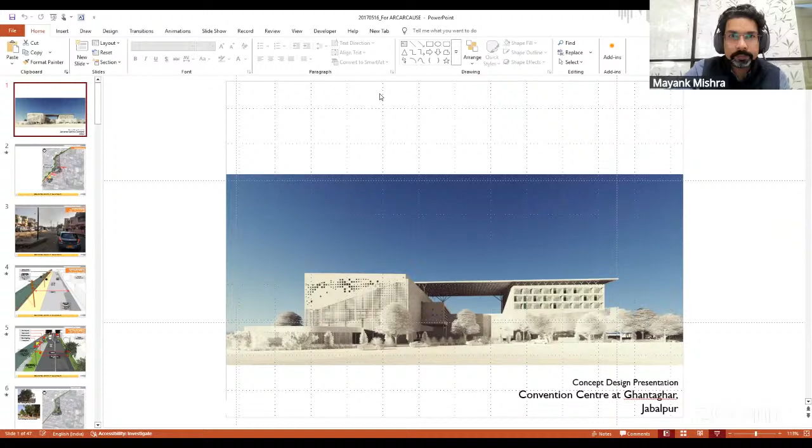So I hope you can see my screen. Yes, it's visible. Not full screen yet. So is it full screen now? Getting the full screen? Not yet. Wait.

Yes, we got it. Okay.

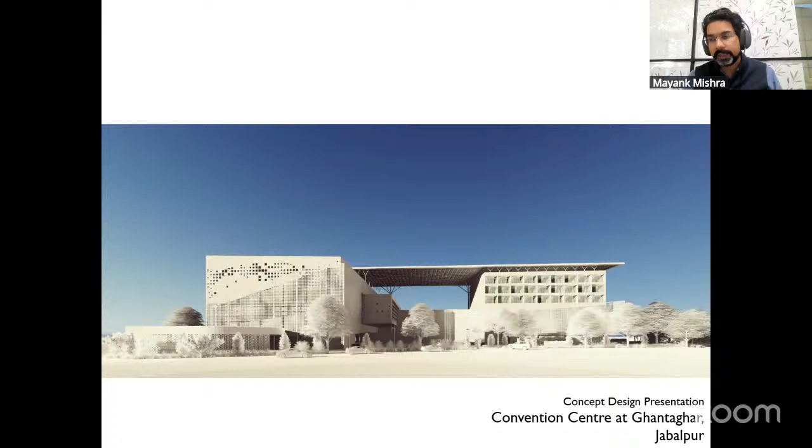So this was a convention center designed for a project in Jabalpur. It was a competition project set by Jabalpur Smart City. They had a very tough site, which was in the center of old Jabalpur and the new Jabalpur, which would mean that old Jabalpur was pre-British era Jabalpur, which was a completely built up site with the style of construction it had was very closely placed homes and all of those.

While on the right hand side, what you see was the British era construction style, where everything was sparse, the buildings were monumental in nature, and they had their own style of construction at that point of time. This site has an interesting approach from various locations, from the old city and the new city both. This is basically what it covers.

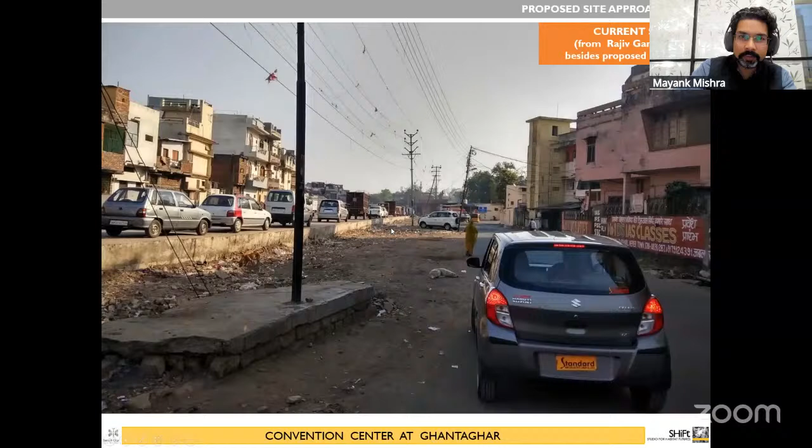It also had a proposed green road running parallel to the site, which becomes one of the most important points when we were designing the whole complex. These are some of the pictures which was from that green road. So it was still under construction. Most of it was designed. So what happens at the urban infrastructure level is people do end up designing the green roads, but they don't end up looking at the nearby low roads of what is happening to it.

So we had a proposal to actually make it much better. So this was the current situation. And instead of going with the business as usual model, we decided to use the ROW to create a separate walkable area, which could be for the pedestrians. And being a convention center, you would have lots of people coming in buses, which could be public transport provided by the center or by the organizer; the road outside can also act as the places where people can get dropped off and picked up, reducing the stress on the site.

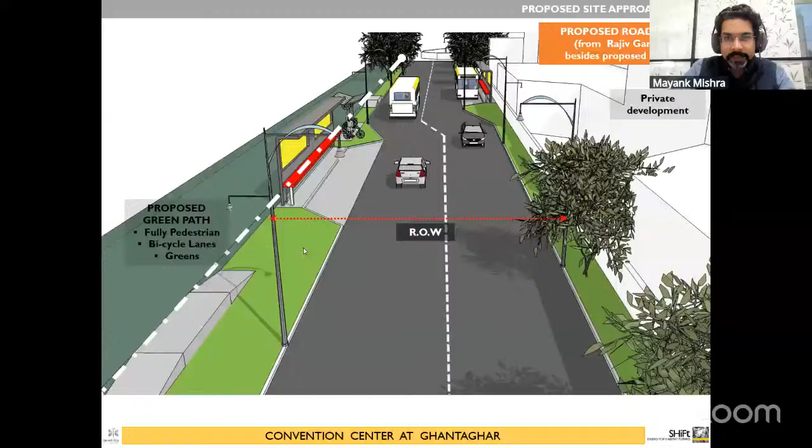Why I'm saying reducing the stress on the site? Because the site was very tight. It was about 2.8 acres, and they were expecting people in the range of 3 to 4,000 coming into this convention. So the right of way was again redesigned in a way where you can have bus drop-offs, walkable areas, and still use it as a two-way carriageway, which was already planned as it was.

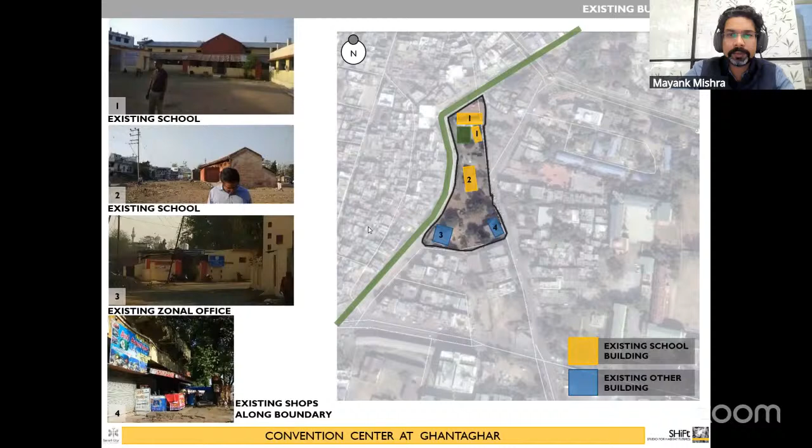It had two existing trees. This was not easy to retain, so we had to let them go. There were some existing schools and other complexes on the campus. This is how the site was. So the rear side is what you see, the green road, which becomes parallel to this road where you see the cursor is right now.

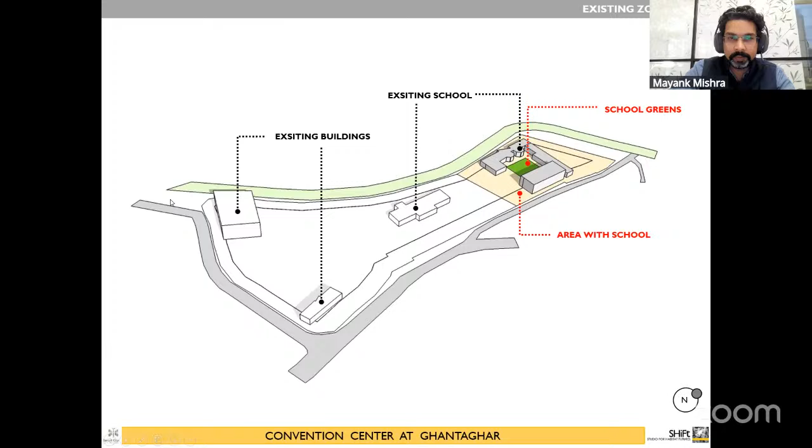So I will quickly jump to the zoning. We had various options for zoning of where to place what. It had a hotel for about 40, 45 rooms with a banquet hall facility, a convention center, and spillover greens, which was required as a part of hotel or convention area. These are various zoning options, and they had their own pros and cons, which we also shared in three-dimensional. Right now, I'm just showing you the zoning bit.

And the best option that we felt was, see, there was an existing school which they were not sure whether they will be able to relocate somewhere in the city, or will it continue to remain on this site? So we planned it in such a way that the school and the banquet hall can have a shared green. So at the evening time, the banquet can have a spillover, while in the daytime, the school kids can use the greens as a play area.

This was a school up to class 4, so it was only a primary school. So it didn't mean that you would need large play areas, but areas where they can actually get together, run, and all. The convention and exhibition facility was placed more towards the road to reduce the congestion and allow quick ingress and egress from the site if there is any parking happening inside.

There was a central court which was planned in such a way that it becomes like a buffer area for both these spaces. So this is how it was planned: the banquet, the convention, and the... Now, when we were doing this planning, we had an option to actually orient the buildings in a way where the convention center could be incorrectly oriented or the banquet could be incorrectly oriented.

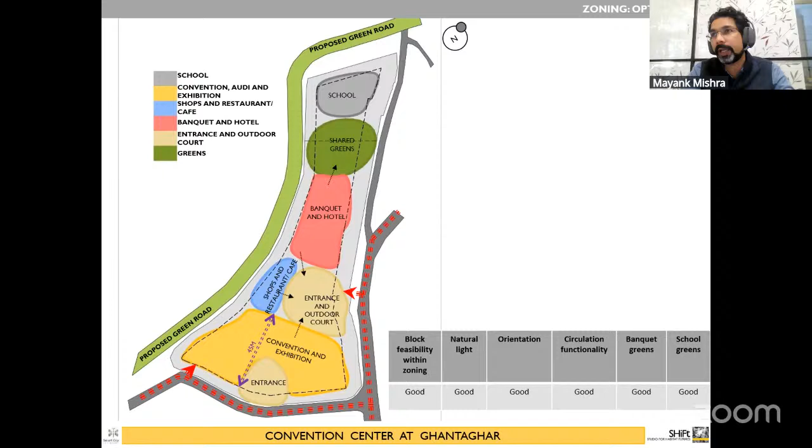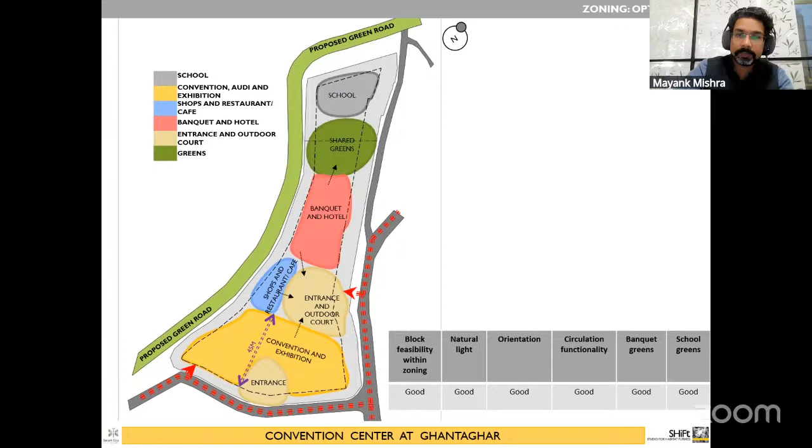Why? The reason being that in the past we didn't have the possibility of large projections because they didn't have a very high contrast ratio. Now with good LED screens, you can actually have projections and lots of things happening even in a well daylit space. So we decided not to go with a convention center which would not be daylit, but have an exhibition area which could be a completely daylit space. It had an auditorium on top of it.

Now, the auditorium was a space which would still need to be dark, so that if there is any function happening, it has that kind of focus towards the stage. That's why the auditorium was decided not to be completely daylit, while the exhibition areas and the conference rooms were planned as daylit spaces.

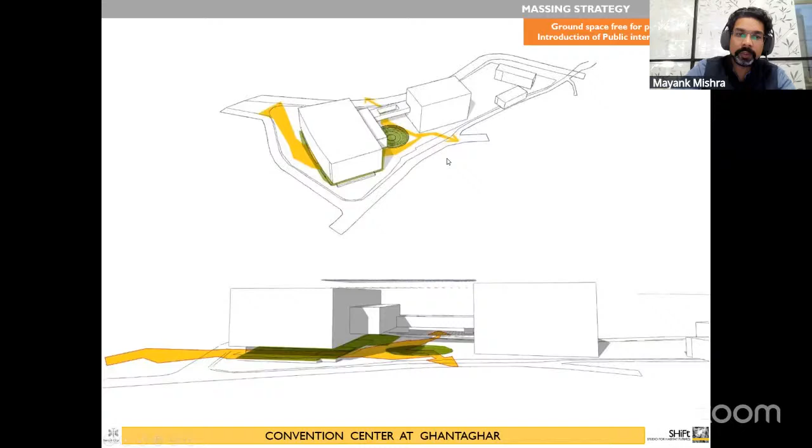The other important aspect was the urban design aspect: instead of creating a space which would hamper movement, we decided to pull up the whole mass of the building and use this space as a buffer area, which would act like a stilted space. This is something the city can use without paying for the convention center. This would act as a space for exhibitions, where people who can't afford to take an exhibition hall can take these spaces and use them as an area where they can display and have an expo.

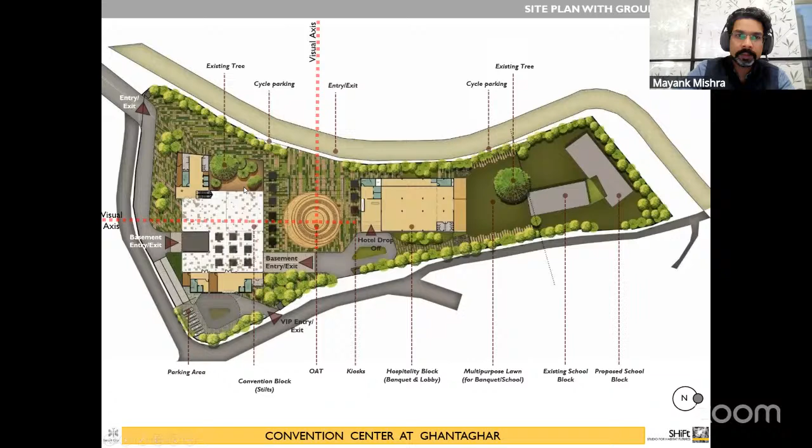Sorry. This is the site plan. I will quickly jump. Left-hand side is the convention, and the right-hand side is the hospitality or hotel block, connected through a bridge. This is where the exhibition hall is, and we decided to have good daylit spaces, so we placed lots of windows on the left and the right-hand side. Similarly, it had lots of other facilities. The exhibition area was a double height space.

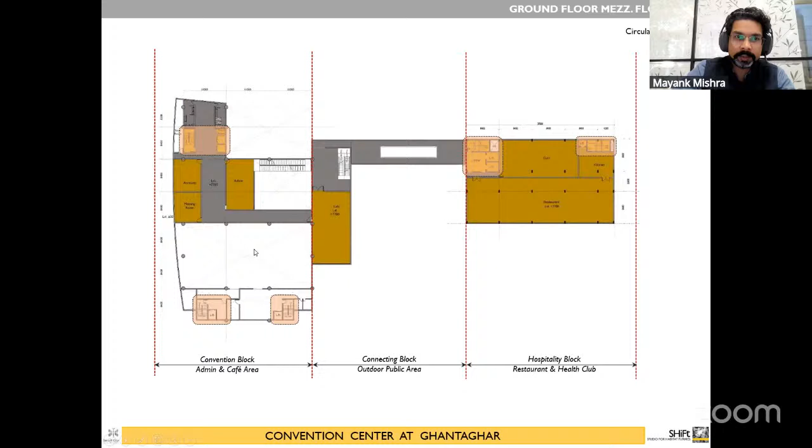Then there were other halls which had the possibility of opening towards the south and allowing south light inside these smaller 200 and 300 seater seminar and banquet types of halls. On the right-hand side is the hotel area. The topmost floor was again the convention's main activity, the auditorium block, which would have about 1,200 people sitting inside it.

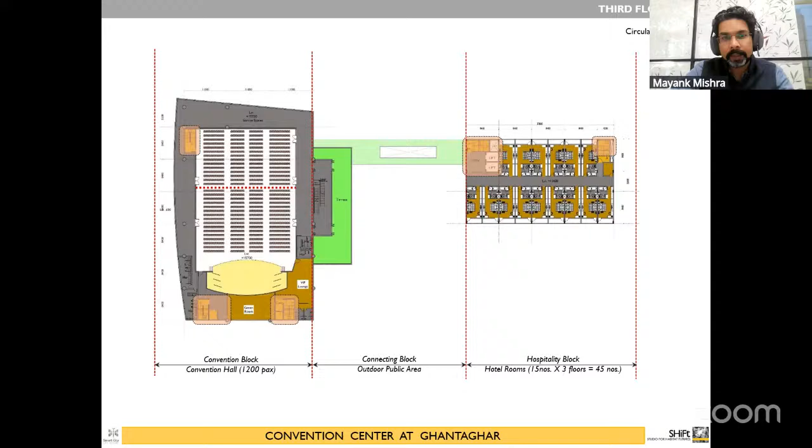We earlier planned to have a flat floor, but later on the client decided to go with a raked floor and not a flat one. The good thing about having a flat floor, which we felt should have been done, but it was the client's call, is that you can use it for multiple types of activities, which is now very common. You can also use seating which can be pushed, and it could be mechanized so everything can go back and you still have a large floor area.

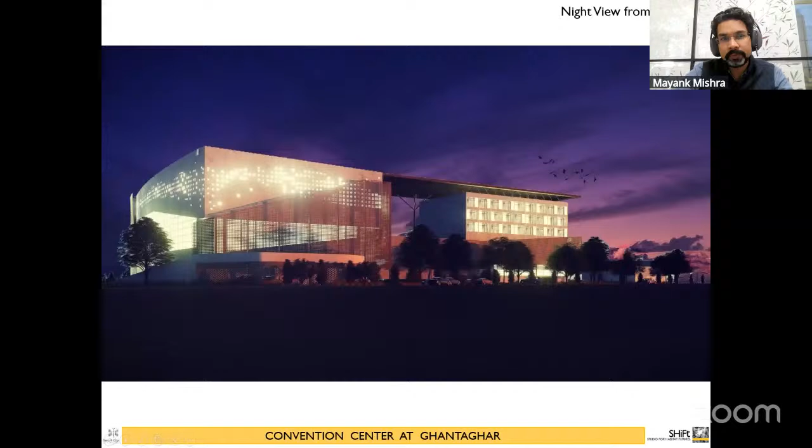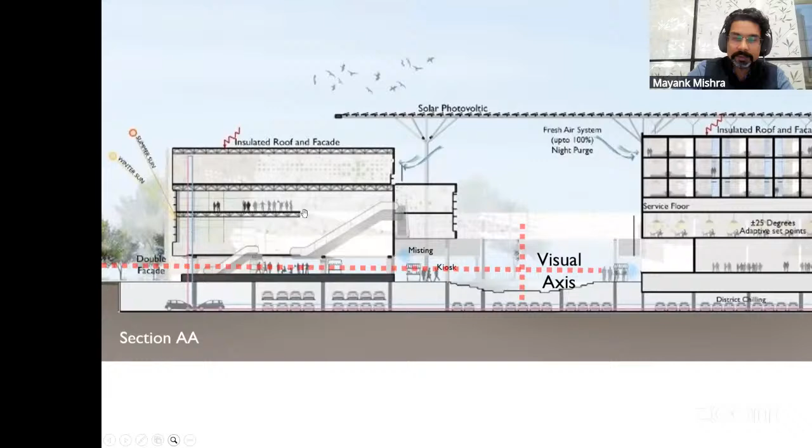These are some of the views from the initial stage. Again, I will quickly zoom in. This is the floor, which is completely stilted, which allows people to use this as a free-of-ticket area for smaller exhibitions where people don't have to pay. The top floor was the auditorium. We allowed good winter sun to enter the complex and summer sun to get cordoned off by using horizontal fins. I will also discuss the roof and other areas in the coming slide.

This is the section through the block, the hotel block, banquet at the lower floor, restaurant, service floor, and the hotel block on top.

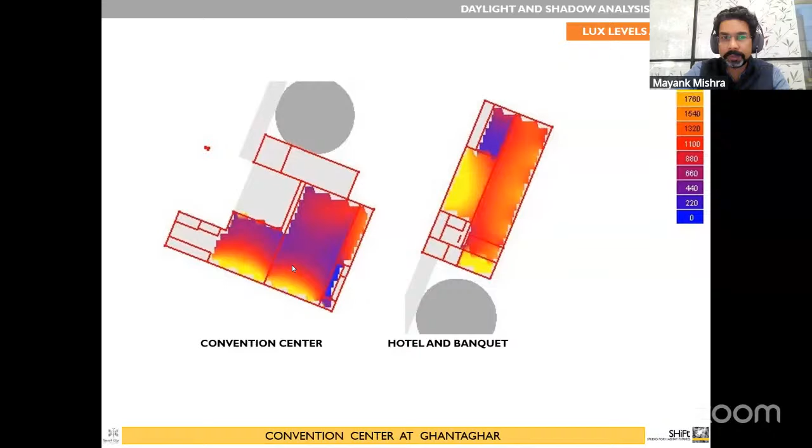Again, some more studies to show, okay, we are getting a good amount of lux level. So anything above 300 or 400 is a good lux level, because then you can have your independent lights in case you need to highlight any product or something of that sort.

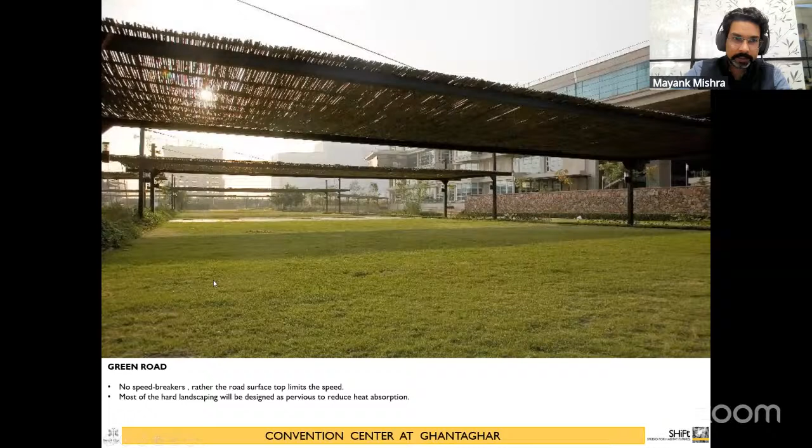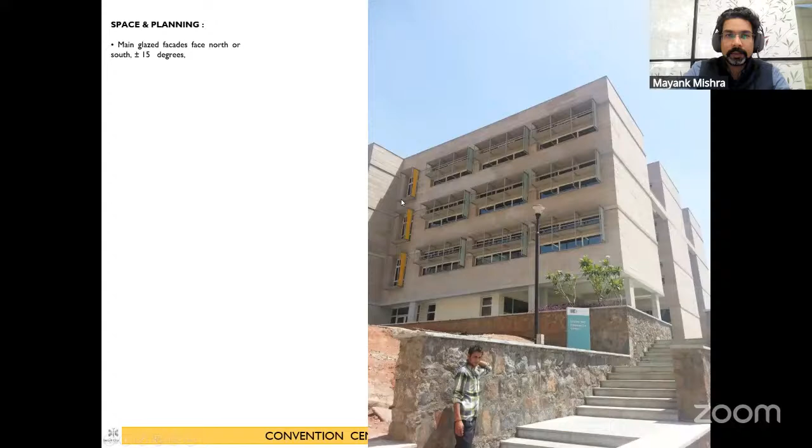Mainly pedestrian first policy, vehicular parking in the basement, the rooftop to be used as a productive landscape and for solar photovoltaic. The glazing to be faced to north and south, maximum plus or minus 15 degrees, which is what we tried, and also have enough shading device to it so that you don't get blockage, so that you don't get harsh sun coming inside the building.

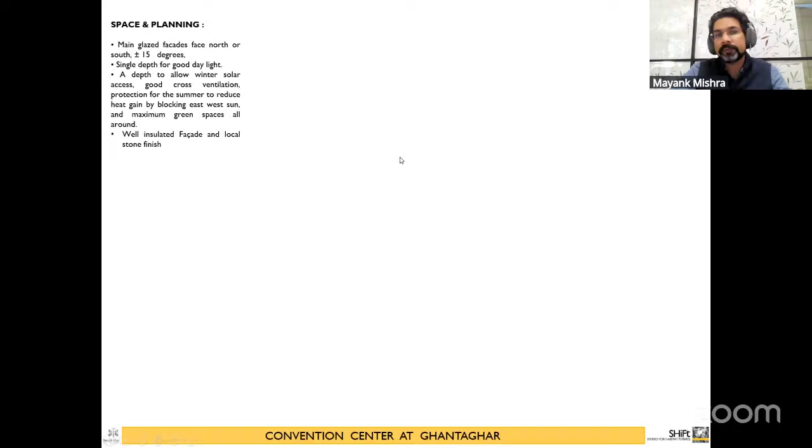Again, enough depth to allow winter sun to enter. Well insulated facade. This was an important aspect of design, which mostly people don't look at.

Now, convention center like spaces have a huge energy demand when it comes to air conditioning. It increases as people enter inside the building, and this is a peak that you get suddenly. It would mean that at any one day, you would suddenly have a huge amount of air conditioning requirement because an event would be happening there.

Now, it was important to insulate the facade of the building, make sure that we don't increase this demand from the external heat. That would mean that if there is any event happening in the month of May or June, when there is much hot and humid air outside, or if it's only hot outside, we should not increase the heat load inside the building because of external conditions.

And all that you need to cater for is the people who are coming inside the building and to cool that space. And that's why we propose to have a well insulated facade.

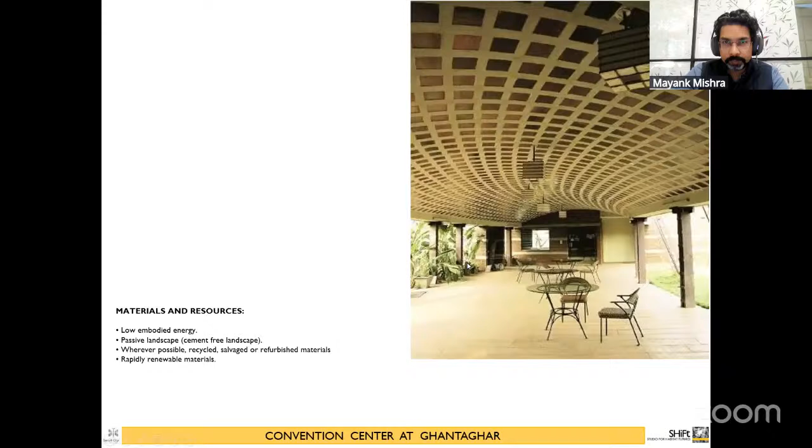Using low embodied energy material, I will quickly jump. That would mean using local stones wherever possible, allowing rainwater to percolate through means of bioswales, and use of lots of stones and other materials, and have rainwater either stored or recharged.

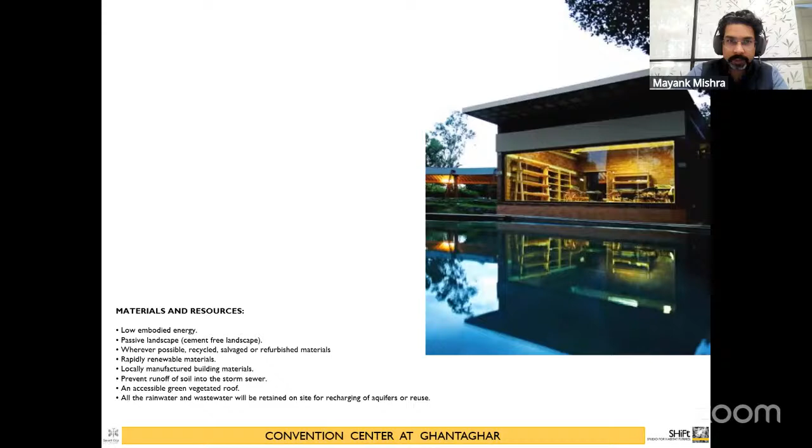When it comes to air conditioning, we decided to have a district cooling system, which would mean that in places where there is exhibition happening or an event happening, at that point of time, all the 45 rooms which are occupied in the hotel would not be occupied because people staying in that hotel will be using this space here.

So we decided to have district cooling, which would mean sharing of air conditioning between both the buildings through a chiller. In that case, you don't have to provide for two cooling plants, and also you can actually look at the diversity and provide air conditioning where it's required, not a place where you are doing air conditioning in both the buildings and actually letting the energy being wasted.

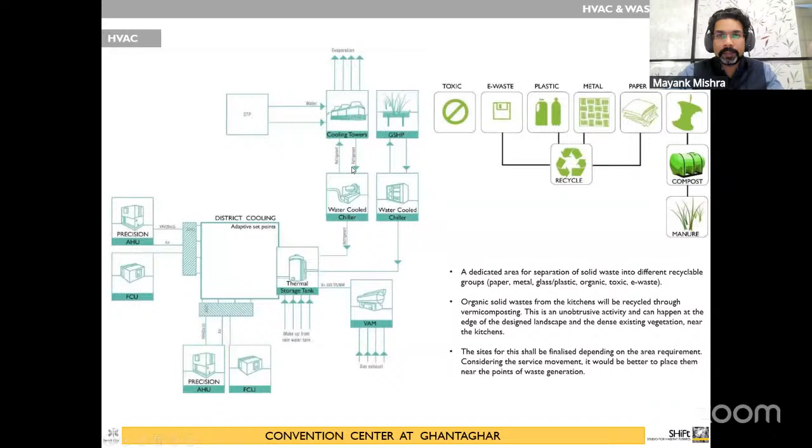So these were some of the images. I will now quickly jump to an important aspect of design, which I wanted to highlight.

Now, when we design a building like this, it's very important for architects to put this thing in front of a client to make them understand what all goes inside a building and what stages they should expect. Generally, the market practice now, post 1990, has become that the day concept design is finalized, people expect that the construction can start in a week's time. And that's not the truth.

Reason being that the more time you spend in designing and planning of a building, the more accurate you would be at the end result. So if I have designed something which would have X, Y, Z feature in it, and if I plan for it well in advance, I would be able to achieve that. And how can I achieve that? That would mean that I have to break this whole complex project into various stages of planning.

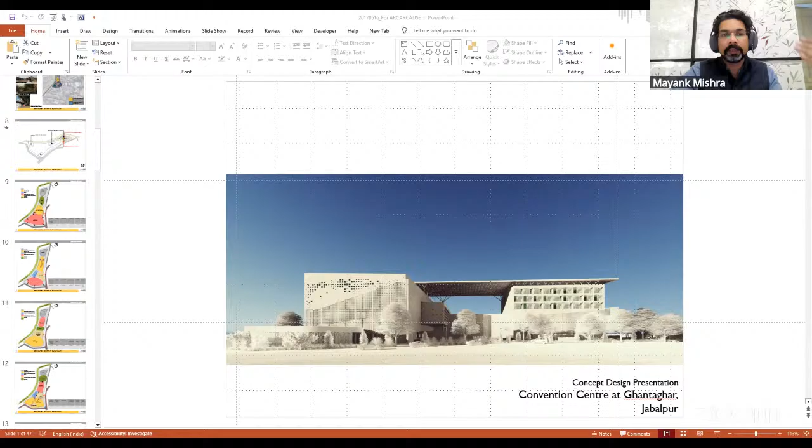The first stage of planning is what I showed you was a concept design stage. This is where you actually set the goals for the project. And it would mean looking at the sustainability aspects, daylight aspect, air conditioning aspect, the lighting, getting client to agree for the cost.

I'm sorry. We lost your feed. Yeah. Can you see it now? Yes. Can you see my screen?

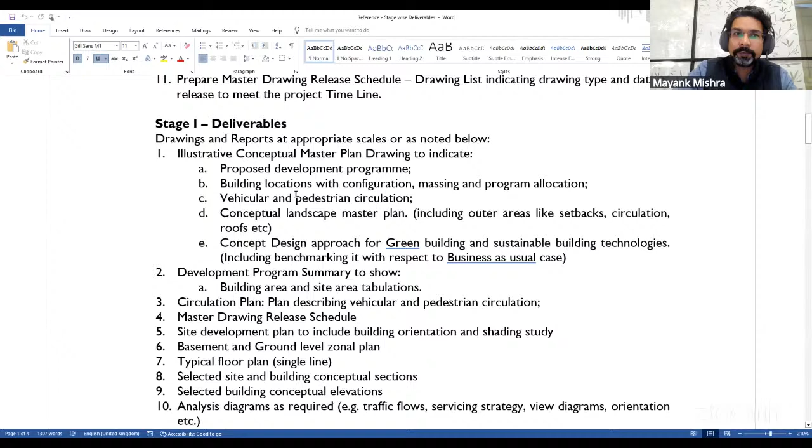Yes. So this is what goes into a concept design stage, and these are the general deliverables in the concept design stages, which would include lots of reports, the sustainability analysis, the traffic flow, the design basis reports for the structure, for the electrical, for the plumbing, and a project budget, which is very important when it comes to a live project. Reason being, most of these features, by the time they have to be executed, are thrown out of the window because they have not been budgeted for.

So if you budget them from day one, and if you make it integral part of the whole scheme, you would be able to execute it because the client knows, okay, I don't have to pay extra for it, and actually it's helping me. A simple example: if I would not budget for insulation, the insulation will not be implemented in the project because that cost has not been taken into consideration. That would mean that your air conditioning demand would increase. That would also mean your electrical demand would increase.

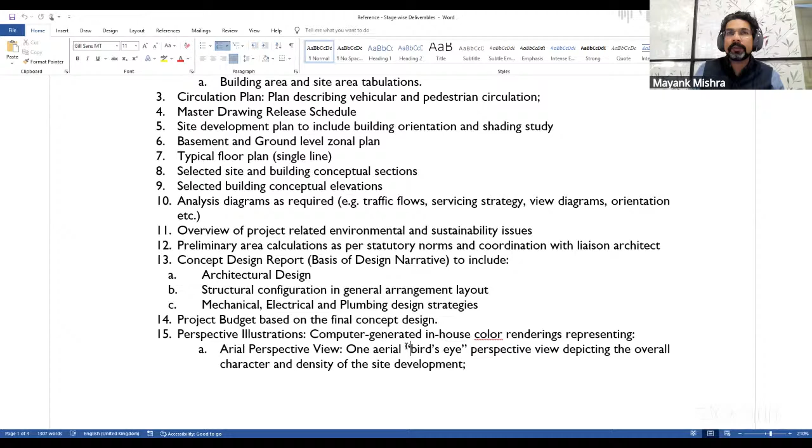What would that mean to the client? It would mean instead of buying a 100-ton chiller, the client would end up buying a 150-ton chiller. And we say, "Chalo, 50 ton hi to extra lag raha hai." But in the overall life cycle cost of that building, the cost of the insulation, which could have been recovered in 3 or 4 years, will go for a toss, and the building will pay for this mistake throughout its life of about 60 years. So that's why it's very important to have these part of the concept design stage from the early stages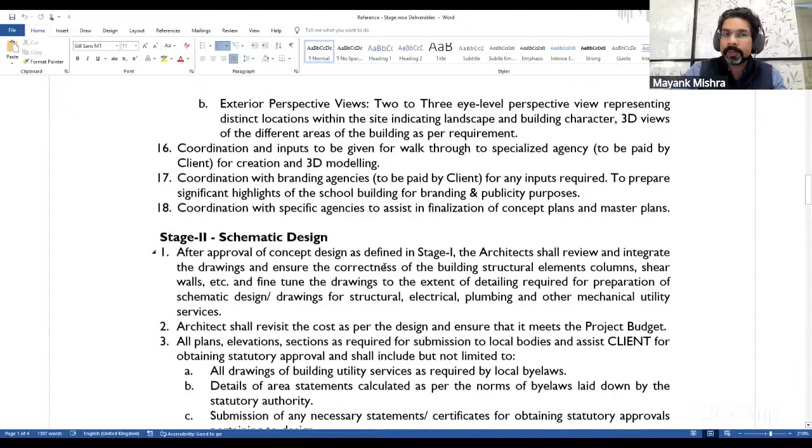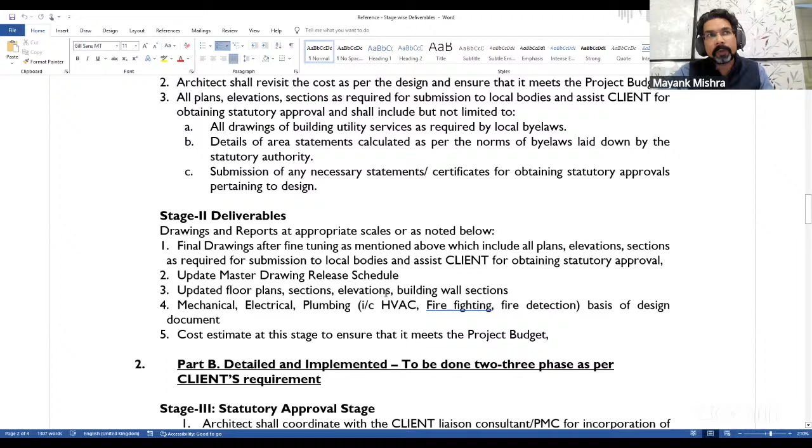and include them. The second stage and the most important stage is the schematic design stage, which is when you actually get your consultant to vet your design, make sure that they are as per the requirements. You have your single line diagrams, your requirements for air conditioning, your locations for all the shafts and other things, so that you don't face the problems when you are going into actual execution.

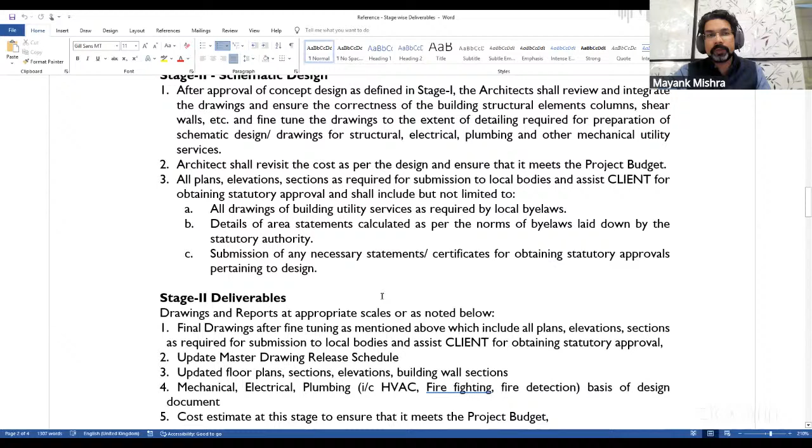After that comes your statutory approval stage. Now, in all of these stages, you need a sign off from a client. If they don't, it would actually mean that you're just doing it for yourself, and if you don't make them part of it, they will not agree to it at a later stage. After that comes your statutory approval stage, which is when mostly you get your licensing done, which is the approvals from the local bodies.

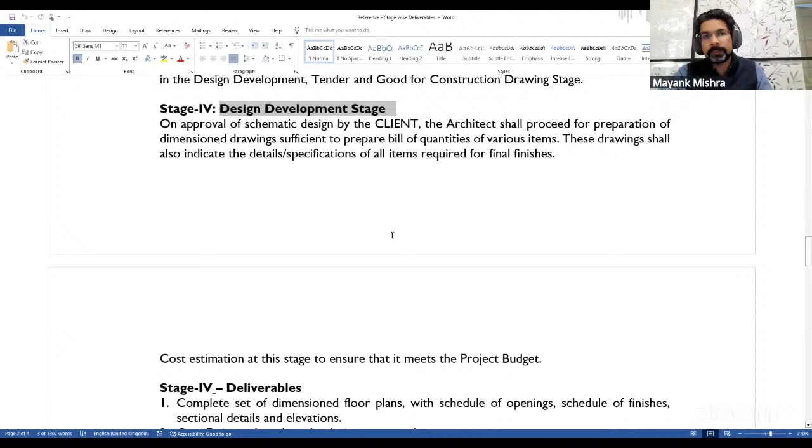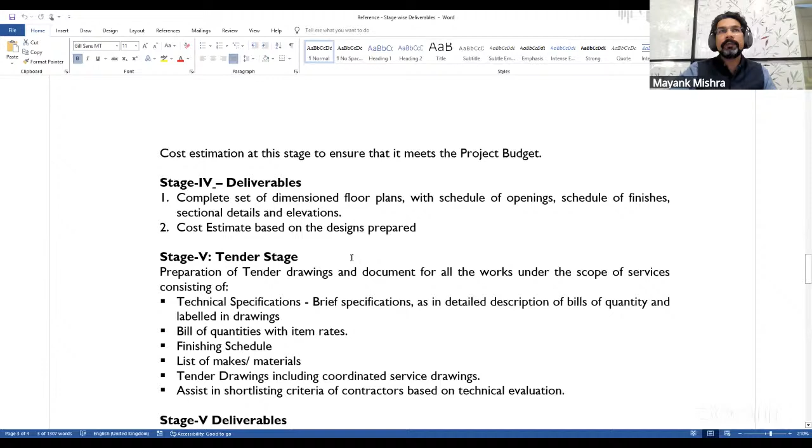And in parallel to that, you would run a design development stage. This is a more detailed stage than your schematic stage, because here you are actually putting the real dimension that would end up becoming tender drawings and help the person who's bidding for it understand the building well in advance. If you have not put those things in early stages, then the person who's bidding for it will miss lots of important details and end up not quoting for it.

Then last is your good for construction drawings. Now that includes all kinds of drawings, and I would always recommend to have GFC drawings in place before you actually break ground, because otherwise you will end up messing up the project.

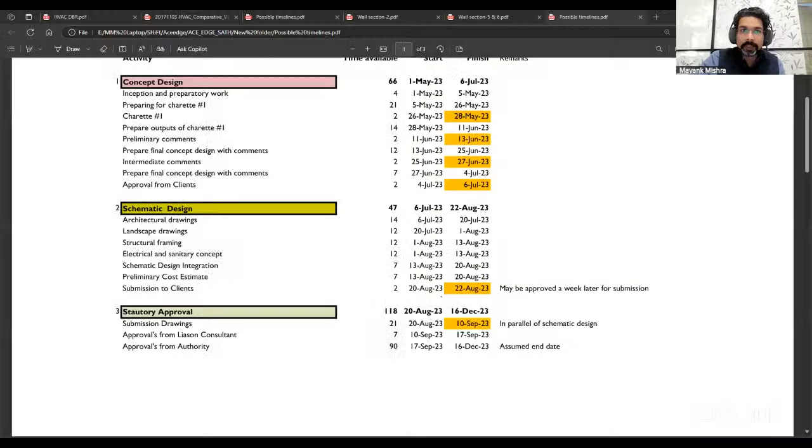I will quickly show one of the project timelines so that you get an idea of what it means when you are sharing it with the client. Now, this is something which we do with our clients even before we get on board, which would mean even before you are about to sign an agreement with the client, you should tell them in advance, expect so many days for the concept design, expect so many days for schematic design.

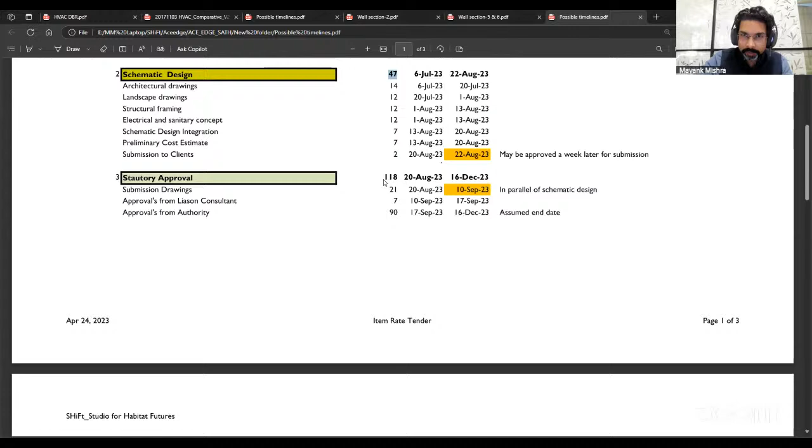Then comes your statutory approvals. Your design development happens in parallel, meaning while statutory approval drawings are getting approved between 20th August to 16th December, you have time to finish your design development and tender stages and have a good-for-construction drawing ready the moment you are about to start construction.

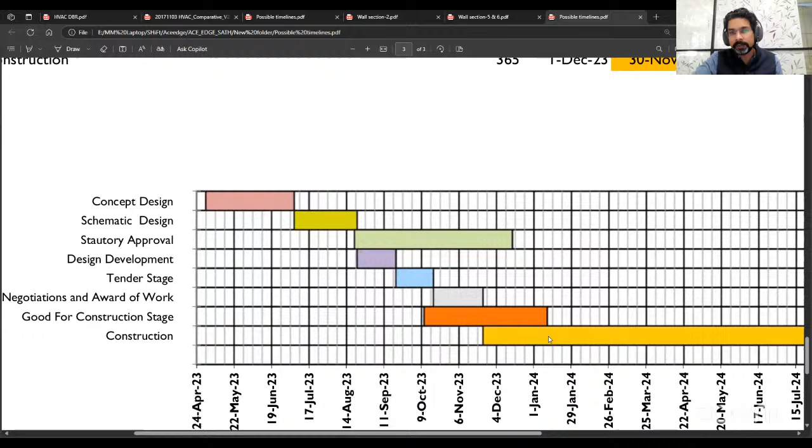This is how it looks in a bar graph. If you can see my screen, the concept design leads to schematic. The statutory approval takes a longer period. That's where you do design development, tender stages, and good-for-construction drawings. It's always important to finish it before the actual execution on site starts.

I will share some more important insights of this project, which we included during the tender stage — some of the drawings. So when I say your contractor needs to know all of these details in advance, this is what it would mean your tender drawing should look like.

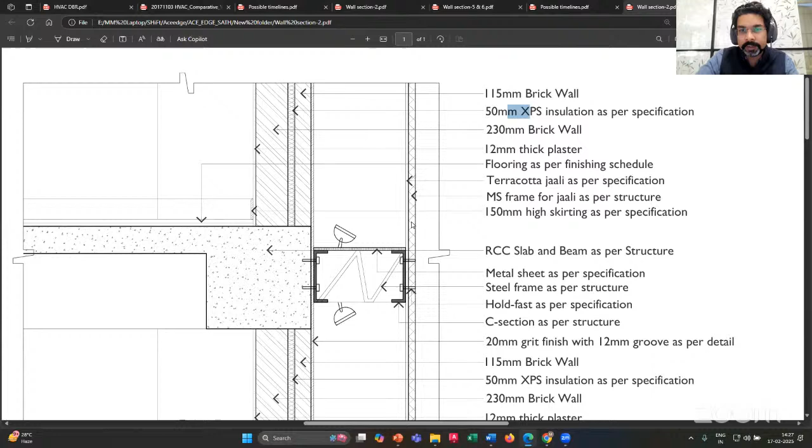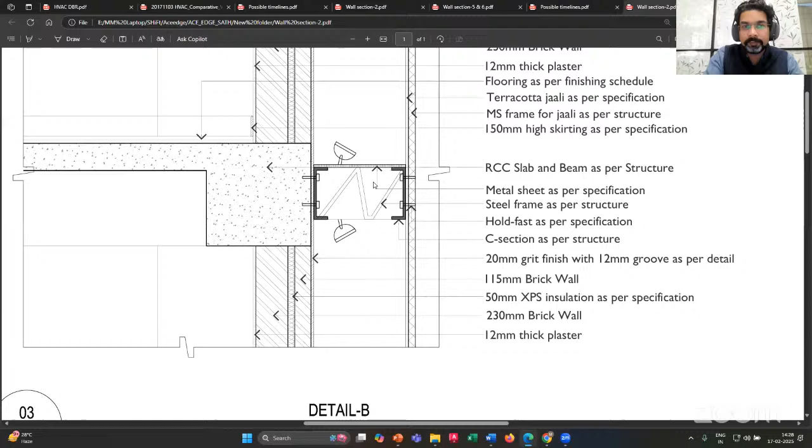It would mean that you have already included insulation as part of the building design. It should also show your building elevation, how a double facade would work and where it would get supported — though you won't have a good-for-construction detail for it yet, since your structural consultant might not have even detailed the size of this member. But having this in place lets the bidder understand how much needs to be done and how to plan for the project. Otherwise, he will either miss on cost or miss on time, which the client would not want to compromise on. It should also include details like terrace waterproofing and insulation.

So these are some sample drawings that become part of the tender stage. There are about 15 to 20 sections that we share with clients and contractors before they bid for a project, and thereafter they go into the construction stage where they see the details of everything.

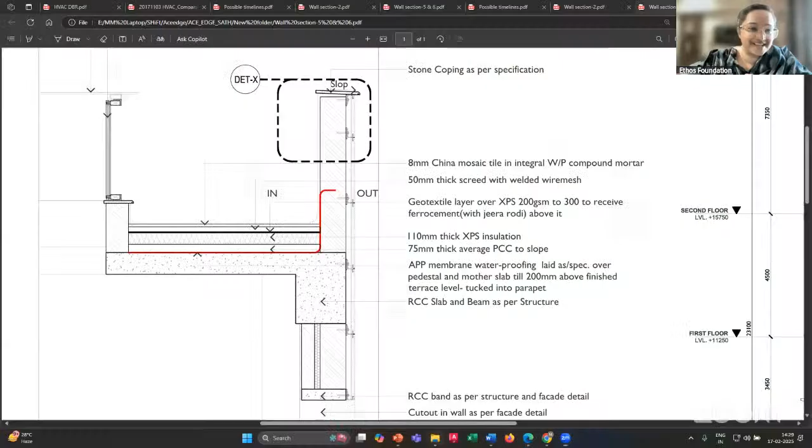It's the short one. This was a project in Defense Colony, Delhi, in an urban landscape which had a few existing trees. The client loved the trees, and so did we. We wanted to save them. These were some interior pictures of the existing building.

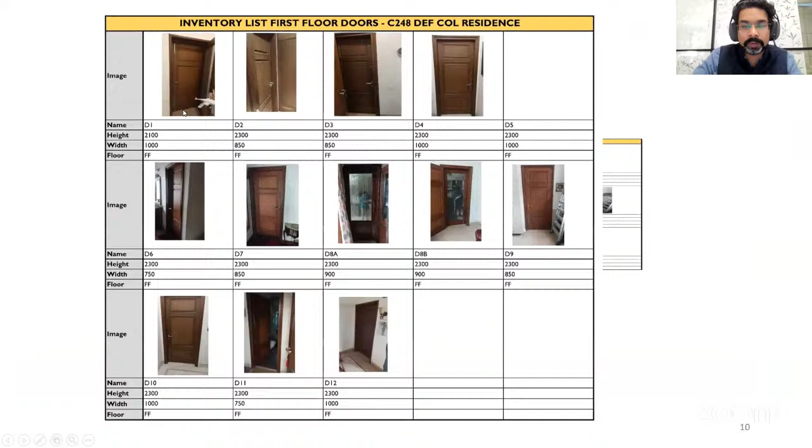We decided to reclaim all the wood possible, the teak which was used, and reuse it. So we labeled them before the demolition started, and made them part of an inventory list for the tender when it was about to come.

The design was again based on the principles of solar passive architecture. So we made sure that you get good winter sun.

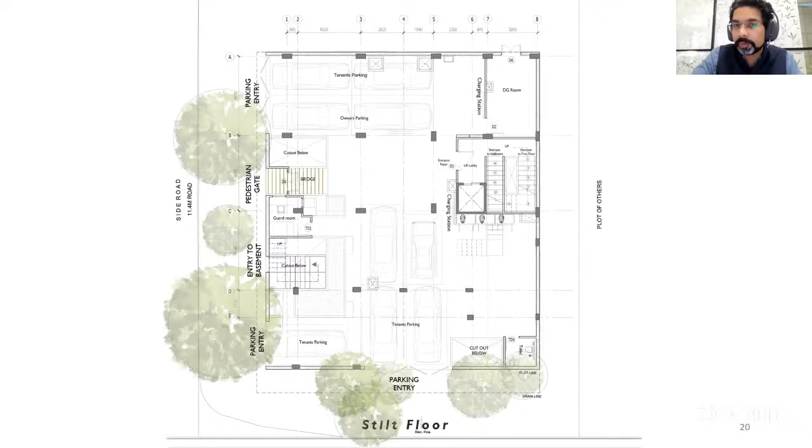During the concept design stage, we made more than 40 or 50 options for these kinds of plans so that the client doesn't change it at a later stage. We wanted to make sure they don't end up saying, what if this study room goes on this side and the bedrooms go on that side. So to avoid that, we did all the iterations during the concept stage itself. That's why you need more time during the concept stage than later stages, where the client would end up changing things.

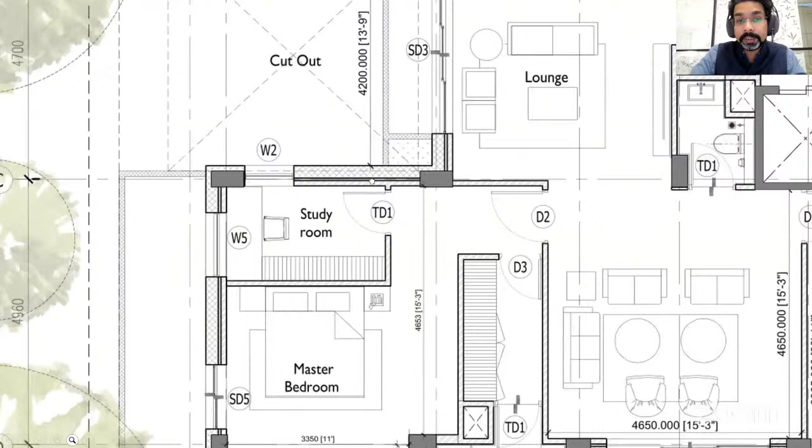These were some important features, including the super insulated roof. From the initial stages, we got clients to understand even in concept design that the wall thicknesses would be much higher, giving more comfort. They knew what the room sizes would be. This gave them the confidence to understand that even if they were losing some square footage in a prime location like Delhi, they would still get better comfort inside the building.

That's why it was important for us to make this part of the concept design stage itself — an external AAC block, insulation material inside, and then an internal wall, making a complete thickness of about 450 mm.

Efficient double glazing, cross ventilated spaces, indoor air quality. Because Delhi has a huge problem of PM 2.5, we decided to go with an air conditioning system which would allow fresh air to come inside the building without compromising on the indoor air quality.

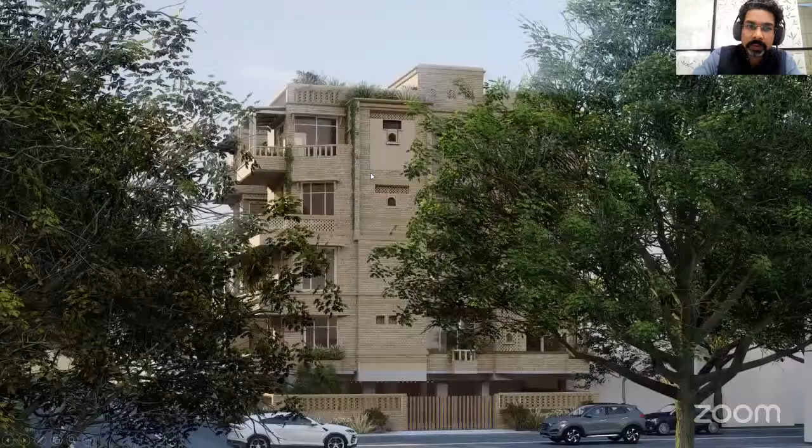So there were various air conditioning systems which we utilized for the building, using low carbon material, locally sourced. These are some renders we created. This is now under construction, getting built in CSEB block with lots of local stone. The plain brown color you see is the stone, and the rest is the CSEB block.

These are some more images, and this is how it would look. So it would not look like any other builder house that you see in Defense Colony or in Delhi. An important thing we did was create a courtyard on the third floor, which was a wow factor for the client. They wanted to feel that it's a ground floor building only, so on the third and fourth floor we created a good connected large courtyard space.

This is that courtyard space, and these are some more renders.

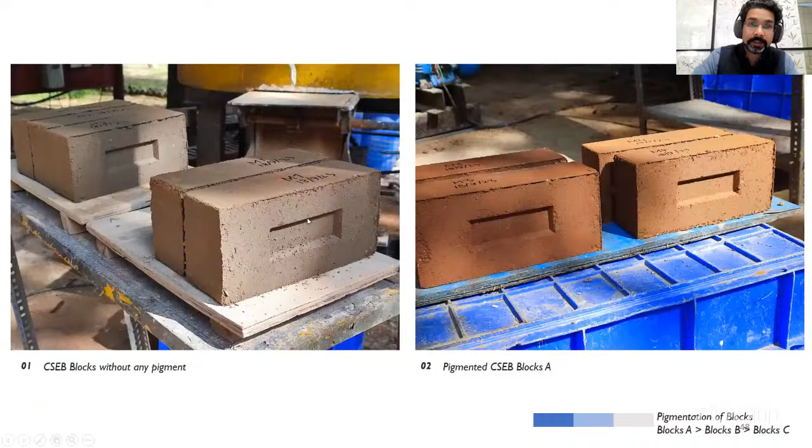Now, even with CSEB, before the project started and went into construction, we did lots of iterations in the color and other things, got them approved by the client, and then went to the tender stage. These are some details which I will share with the team in a one-to-one session, but all of this becomes part of the design.

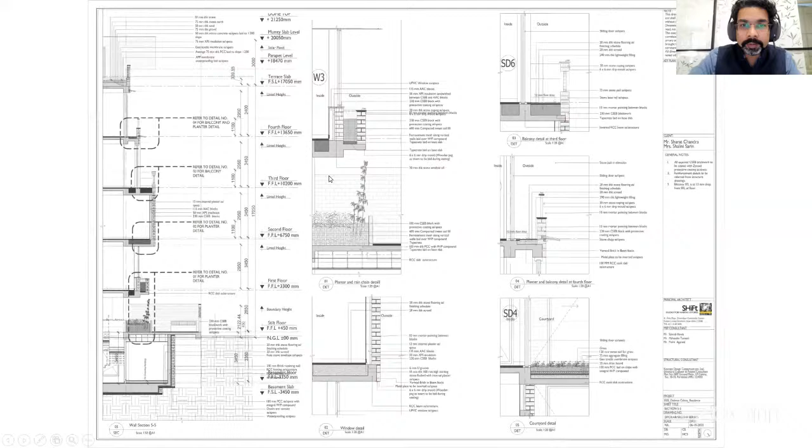I'm not showing services right now, because services is a very complex process which I will explain to the team separately. I'm showing architecture because it's important to understand, as an architect, it's our job to include all of it, like this drip irrigation, in the early stages of design itself, and also to make sure the thicknesses are already in place for everything we are designing for.

These were part of the tender drawings we gave to the contractor, and this is where we spent a lot of time. Later on, it became much easier for us to execute on site. These are some more sections. I will stop here.

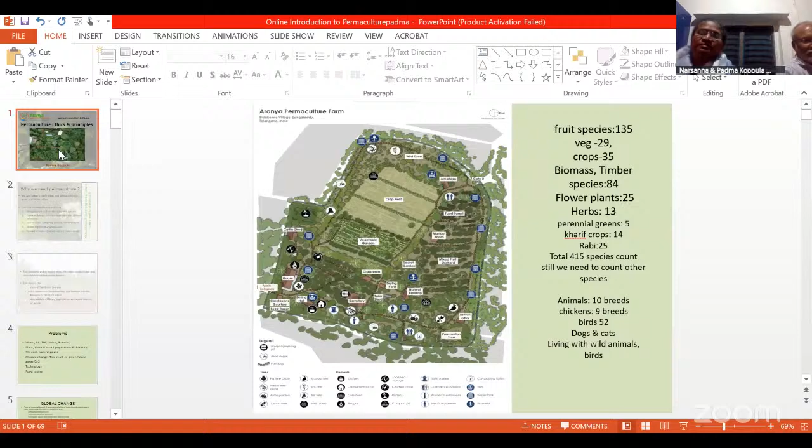Yeah. Yes. Padma, go ahead quick. Yes, sir. We can see your screen, ma'am. Is it audible now? Yeah. Can you do the slideshow mode? Just the full screen? Yeah. Yes.

Some of the slides I'm skipping because we're running out of time. Narsanna already spoke about it. So what are the things which we want to do as designers? We want to live on planet Earth: environmental conservation, reforestation, land protection. What is it that we want to do? We want to live with the environment and we want to work with nature. So we need to consider

You're not audible, Padma. Sir, I think we lost their connection. If you would like to continue.

other things. We need to talk about renewable energy, energy, culture and art, everything we need to talk about. Those who want to know more about permaculture can just read about it. Narsanna already explained it. It's the conscious design and maintenance of cultivated ecosystems which have the diversity, stability and resilience of natural ecosystems. Narsanna already told about how we can create the microclimate.

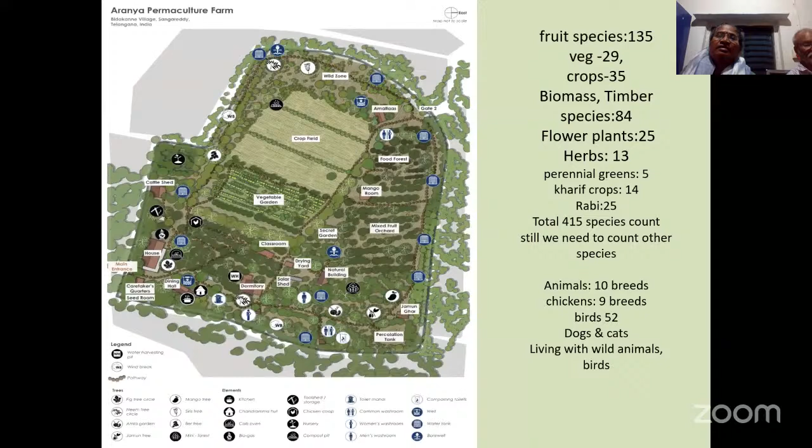As I said, all 365 days, how we can generate food. Food for the humans, food for the birds, food for the microbes, food for everything. It's self-sustaining, meeting our needs, meeting their own needs. So that's where the permanency is. Permanent agriculture can continue in the same design. Observation: when you are designing something, observe wind, sun, water flow, trees, and surroundings. First observe and then start interacting with any structure or farm before you do anything.

Catch and store energy. Padma, you are exceeding your time. There is one more question. How much time do I have, sir? Yeah, I think you should just do your closing.

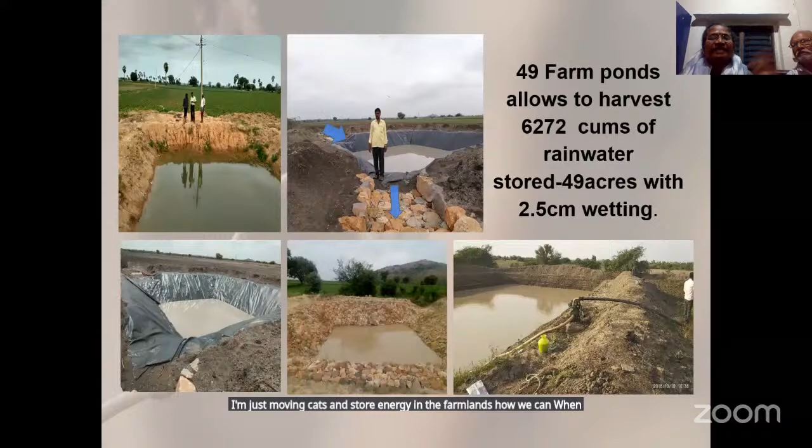Okay. So like that, we can design the farm. This is a small design which I can show, how the entire water can be stored by designing these things. There is a big slope. I'm just moving on. Catch and store energy in the farmlands: in dry land areas where there is no water, how you design, what material you use.

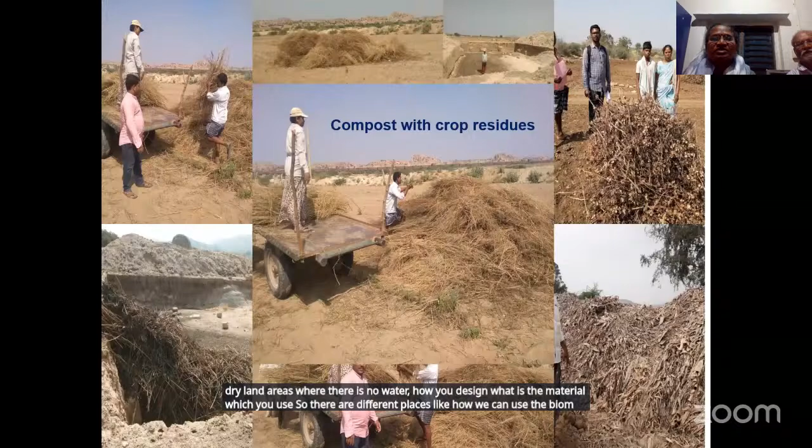So there are different places, like how we can use the biomass, how we use solar energy, how we save different species of seeds, and then obtain a yield for every life, how we can get the food. So how we can design according to your design, and also working with diverse women and men, people, and community. And sometimes we may have a lot of desires, but what climate change is offering us, we need to keep in mind and act upon.

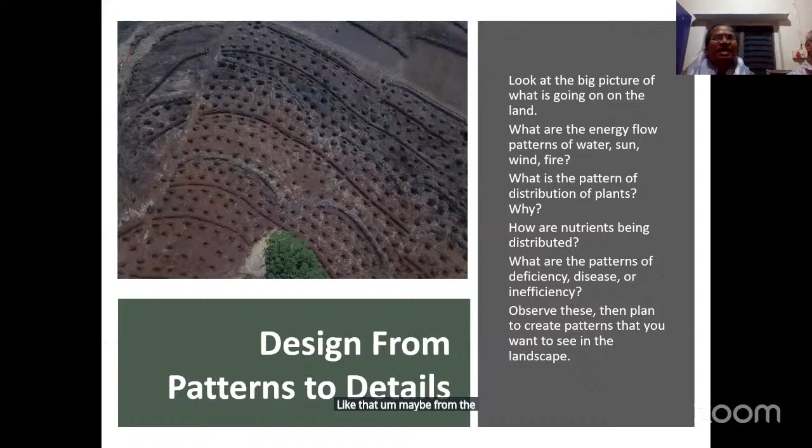And using local resources and producing in new ways, always try to give importance to local resources and renewable services, local seed, local fertilizer, those things. How we are using grey water systems, how you design from patterns to details. In natural patterns, how are you going to mimic them in the design? Maybe from the forest ecosystem, any ecosystem you can take. If you can mimic those designs in our design system, they are more resilient.

So how are you going to create natural guilds? There's a circular pattern, there's a random pattern; how we can integrate different elements into the systems for more energy, and always start small and scale it up, like in a 1 acre place.

So how the diversity is giving so much energy, so much food. So these are the things which we can have in permaculture: how you design your life, how you design your systems. Like I also work with farmers, and the farmers, though they have 100 acres, they don't have food. But people have 1 acre of land, and because of their design, they are able to access all kinds of food. The entire thing is how you design. So what is your objective of it?

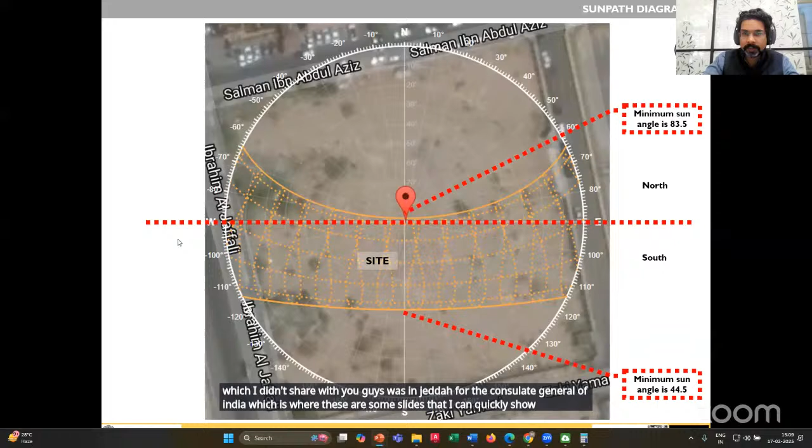This is another project which I didn't share with you, in Jeddah for the Consulate General of India. These are some slides I can quickly show you, where we did the sun path analysis of the whole thing and also analyzed the dry bulb and the relative humidity map of the city, Jeddah. Jeddah being a place where the maximum temperature doesn't go above 40 degrees Celsius, but the humidity level goes as high as 90%.

And this becomes very challenging when it comes to designing a building to reduce the demand for air conditioning. If I go the traditional route, any air conditioning engineer would say you have to air condition the whole building throughout the year. And if I take a step back and ask what I can do to reduce it, I would try to plot it on a psychrometric chart with the help of my air conditioning consultant, and find out what is happening.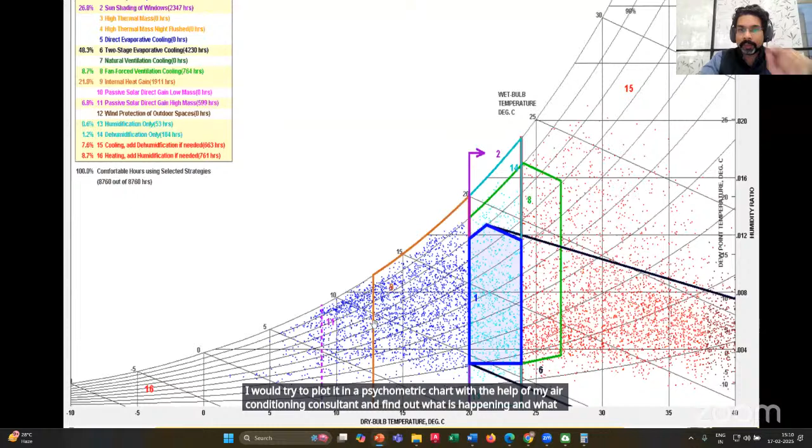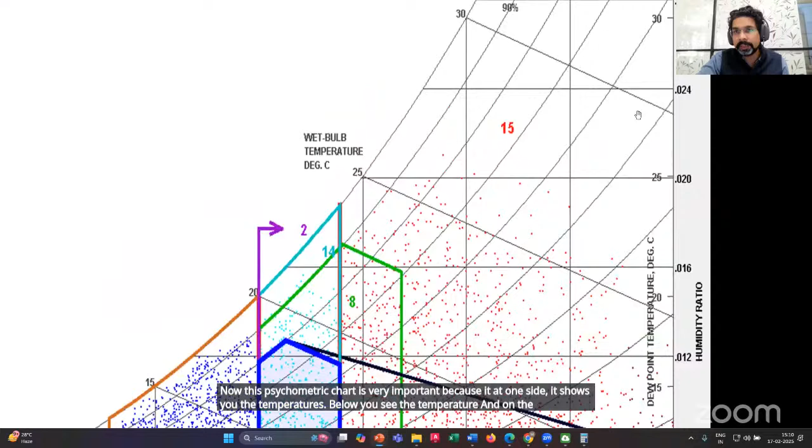Now, this psychrometric chart is very important because on one side it shows you the temperatures. Below you see the temperatures, and on the right hand side you see the relative humidity. So these lines are humidity lines and these lines are temperature lines. Now, when you plot the whole season, the complete year, this is what you get. And then you start getting various subsets of it, which would mean various technologies or applications that can be used.

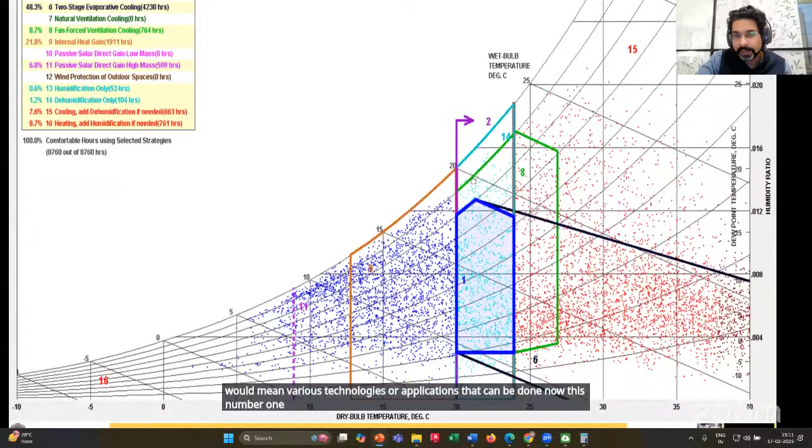Now, number one is where the temperature is less than 25 degrees Celsius and humidity is under control, not as high as expected. In this kind of scenario, you can actually get comfort by not doing anything. Number two, you can actually achieve good comfort just by shading the building. So if you shade your building, you can reduce your air conditioning demand dramatically.

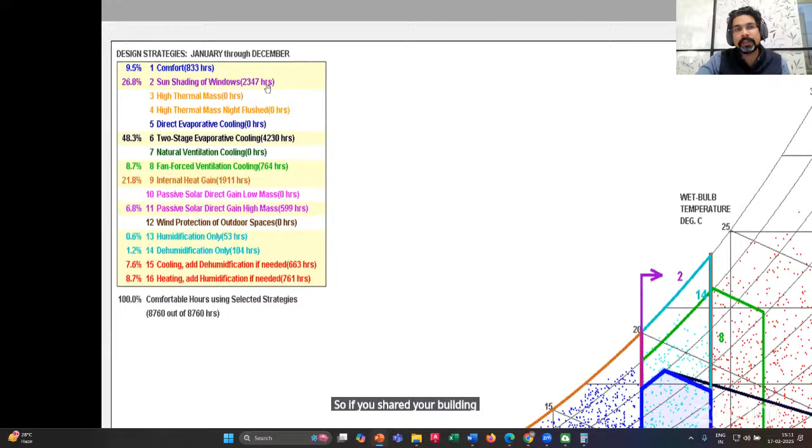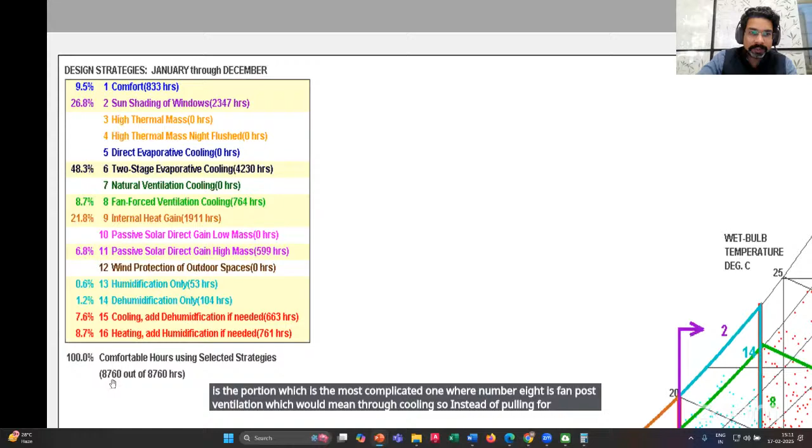Now, there are various other stages you can actually look at. This red is the portion which is the most complicated one, where number 8 is fan forced ventilation, which would mean free cooling. So instead of cooling for the complete 8760 hours, we planned to cool it only for a limited amount of time and not throughout the year. In operational terms this would mean, okay, you will still install an air conditioner, you will still have that capacity, but you will not run it throughout the year.

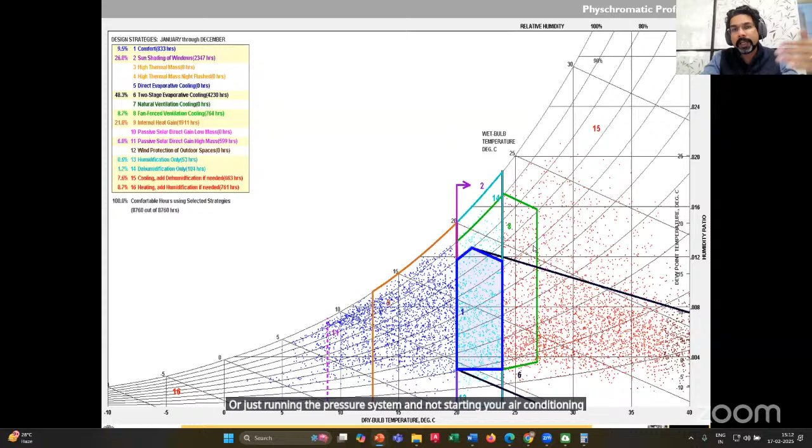And to do that, in services, you will ask your air conditioning consultant to make sure that you have enough data points, which you can do with the help of sensors, of just pushing in the air in the night time, or just running the fresh air system and not starting your air conditioning, or as simple as opening a window and allowing that fresh air to come inside. This was one of the important aspects of design which we did. The other thing we do is make sure that the client and us are on the same page.

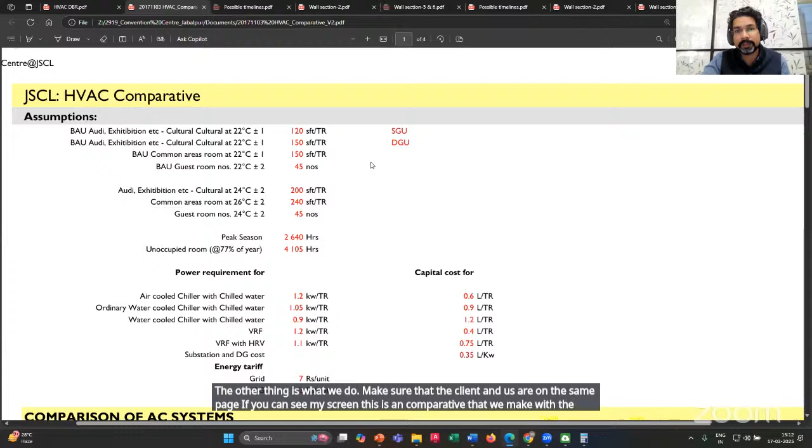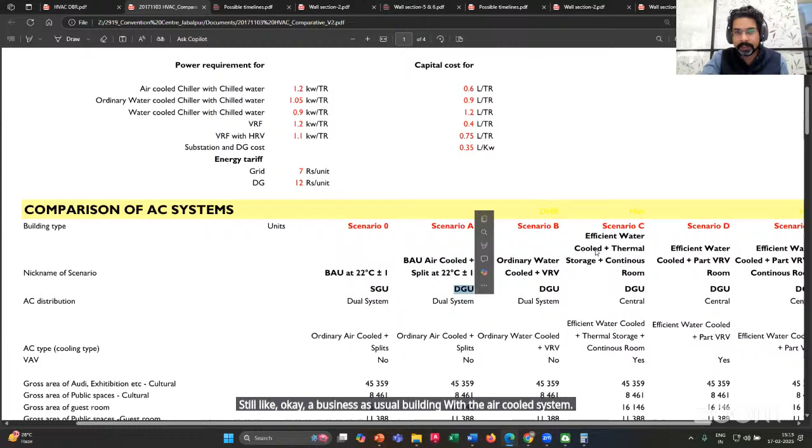If you can see my screen, this is a comparative that we make with the help of our air conditioning consultant, which would have all kinds of air conditioning systems, like a business as usual building with an air cooled system, with double glazed glass, with various types of air conditioning. This is all during the concept stage I'm talking about. And what would be your air conditioning demand? These are all plotted numbers.

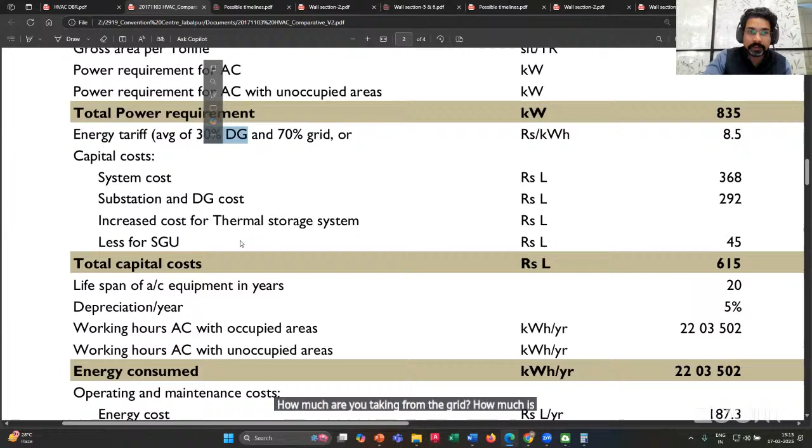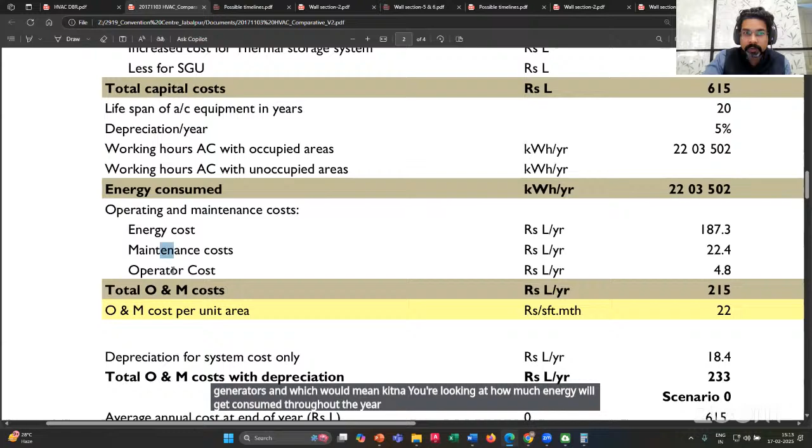It talks about total power requirement. It talks about energy tariff. How much are you taking from the grid? How much is it running from diesel generators? Which would mean how much load shedding happens there. Your working hours, how much energy will get consumed throughout the year? What would be the maintenance cost, the operator cost, the total operational and maintenance cost? And that is what you plot.

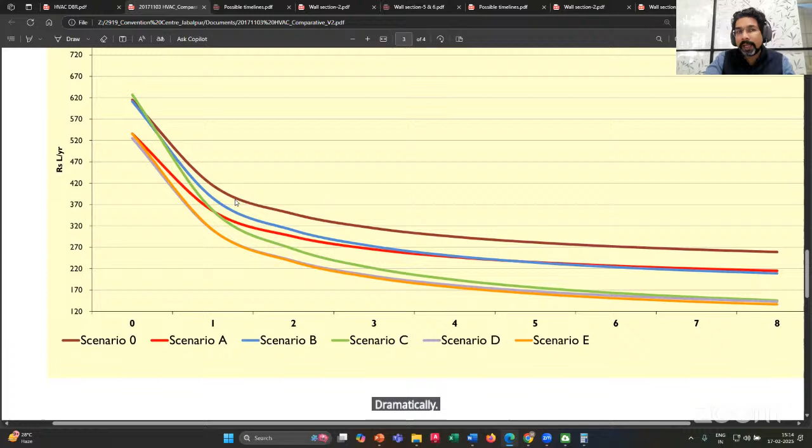And when you see what is happening with various air conditioning systems, here the left hand side is when your building is getting operated. Now the green is the costliest one, if you see. But over the years, the green becomes the cheapest one. In 8 years' time, you will see the green becomes the cheapest because the operational energy reduces dramatically. And that's where the clients are able to take these kinds of decisions. So this is the capital cost investment, and then this is the operational and maintenance cost.

So if I was able to answer, it's an important aspect to start questioning your consultants from day one. What is it that you're doing? As simple as, why don't we have fans in our offices anymore? Most MNCs don't have fans. So you can even question, why can't we have an office with a fan and raise your air conditioner from 24 to 27 degrees? And if you look at most air conditioning technologies, I've been following them for the last 20 years, since I was in college, they have not changed dramatically. The systems are the same. The application style has changed. So it's the way that you apply them in a project that would change.

Thank you, ma'am. Thank you, Mayank sir. Next, is there any experience required for application of permaculture for smallholder farmers who own an acre or less land? Any one of you can answer, Gopal sir or Narsana sir.

I think size is not a criteria for permaculture. You can start from 1 square meter to 1,000 hectares. It is not a technique. It is the connection, the kind of mindset, to what you want to do with that piece of land. At the same time, small and marginal farmers or smallholders have a lot of needs from that land. Then how you look at that? What is the capability of their soil, that land? What are the local resources you have, what really you wanted to do? What is your need and what is the land's need? You have to look at both sides.